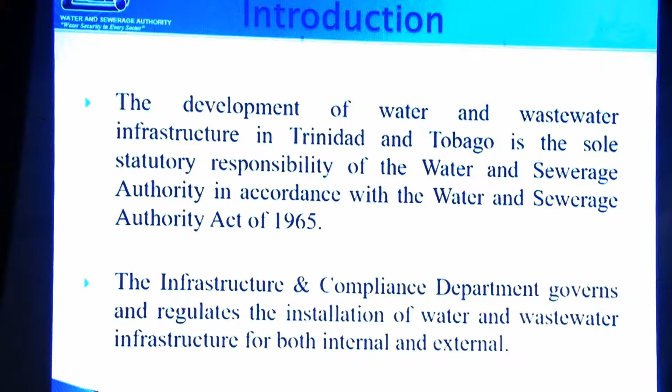The development of water and wastewater in Trinidad is the sole statutory responsibility of WASA. So whenever you plan to do that, you need to come to us for approval. The Infrastructure and Compliance Department of the authority is the department charged with receiving those applications, reviewing the applications, and granting the approvals that are required.

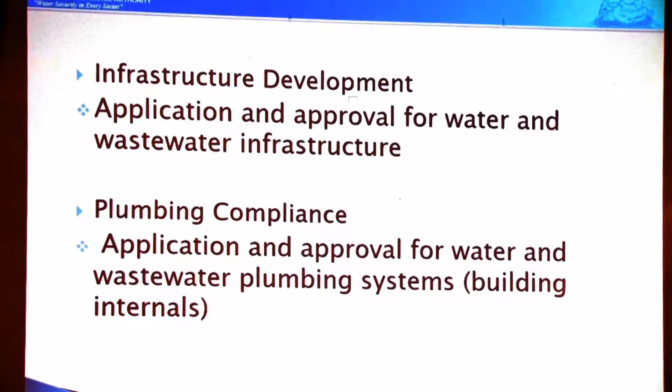The infrastructure development deals with the application for water and wastewater infrastructure, and we'll get into it a little more as we go along. The plumbing compliance deals with the application and approval for water and wastewater plumbing systems, commonly referred to as the internals of the building. I think that is the area where the licensed sanitary constructors are mostly engaged.

So the application processes for infrastructure development: there's the application, which you submit to us, and there are certain things we will do with it. Coming out of that, we'll grant an outline approval. You would submit designs and so on to us, and we'll grant a final design approval, which is a misnomer to an extent - we have removed the word final. Then we get into the inspections, pressure testing, meter inspections. We do the interconnection for the water, and of course that culminates in the granting of a completion certificate.

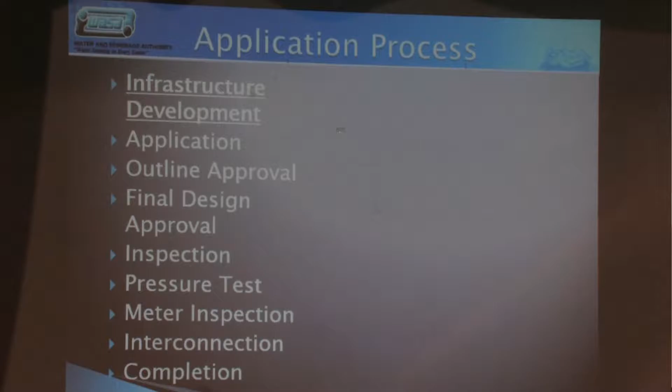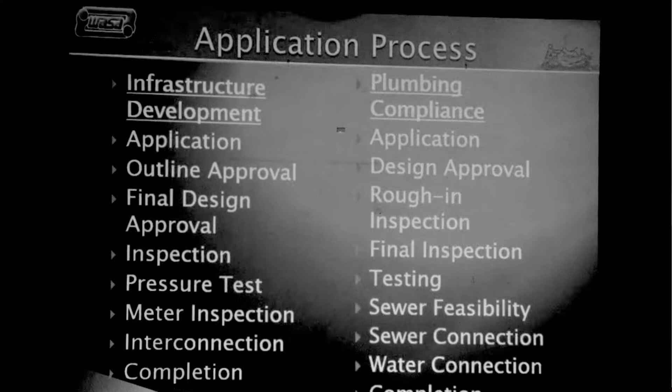For the plumbing compliance component of the department, again there's the application form, the design approval. We get into the inspection and testing stage where we do the rough-in inspection, a final inspection, some testing, a sewer feasibility and a sewer connection where required, water connection if required, and of course again it results in the completion certificate, which in both instances is the prize that everybody seeks - that completion certificate.

So the infrastructure development application process: an application form is submitted. There's a prescribed application form available at the department and on the WASA website, and these must contain the following attachment: the Town and Country Planning outline approval. Without that, we can't proceed - that's the first thing we need to look at.

You would submit it together with a location map, a topography map. In some instances, a certificate of environmental clearance would be required, but this would be subject to the Designated Activities Order - that's with the EMA - and if your project requires that, you'll get it and then submit it to us. There's an application fee of $2,500 for that application.

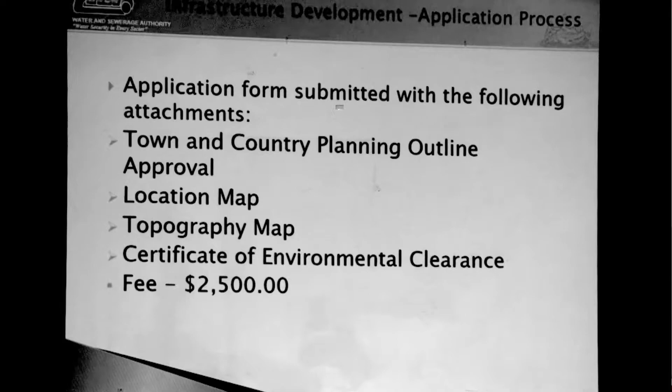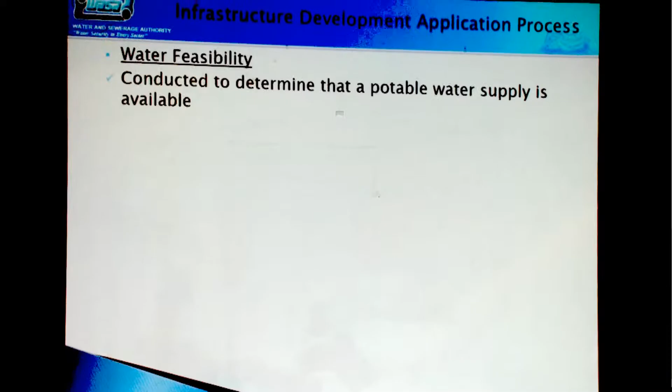Once we receive the application, we begin the processing. We conduct a water feasibility study - this is conducted to determine that the authority can provide a potable water supply to your proposed development. There are certain minimum requirements that we have under the RIC regulations to provide you with, so we conduct this to make sure that we can maintain that.

If the project is not feasible, that we cannot provide that water supply, we advise you of that, and we advise you to reapply within 6 months to a year. If it is feasible, we identify the conditions for interconnection - how we're going to connect your development to our infrastructure - that you would be required to lay certain mains and so on to achieve that connection.

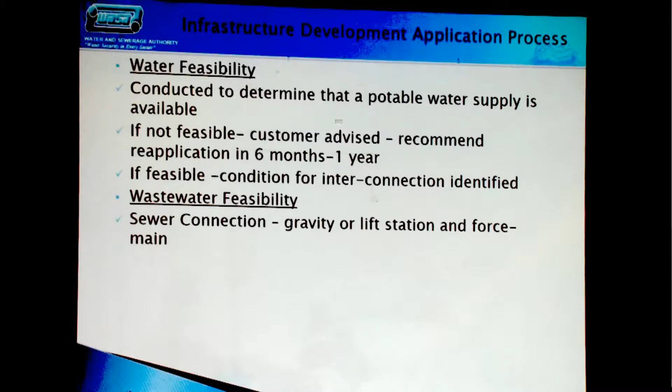We also do our wastewater feasibility assessment, and these are the preferred options we have. Where a sewer connection is possible, that is preferred. If there's an existing sewer system, we'll ask you to connect to that. If not, you may be required to establish a wastewater treatment plant, subject to CEC regulations, so you would probably need a CEC in those instances. Or we will ask you to establish an on-lot wastewater system: septic tank followed by a secondary absorption system, soakaway, absorption trench, filter trench, or ATUs as required.

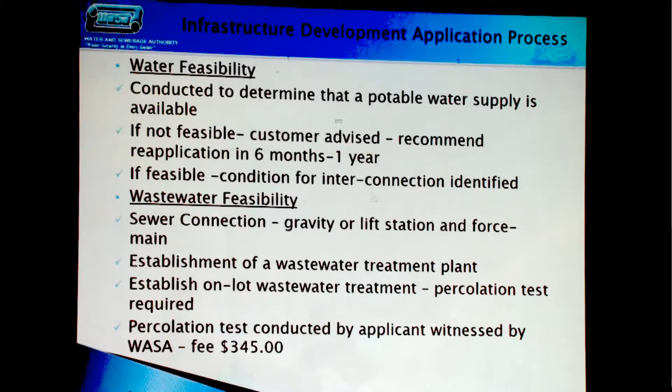Where on-lot systems are required, we may ask you to do a percolation test. There's a fee of $345, VAT inclusive, that you pay for the percolation test, and that determines the soil absorption rate at your specific development.

As we get into some of the initiatives, this is one area we have adjusted: we go with the maximum in each instance. For soakaway, 25 millimeters in 30 minutes, which is the percolation rate. For absorption trench, we go to 45 minutes, or we tell you sand filter trench. This shortens the process time, so we give you that and tell you to design accordingly. If you choose to vary from that and want to do a percolation test, we will facilitate it, but normally we don't conduct percolation tests anymore.

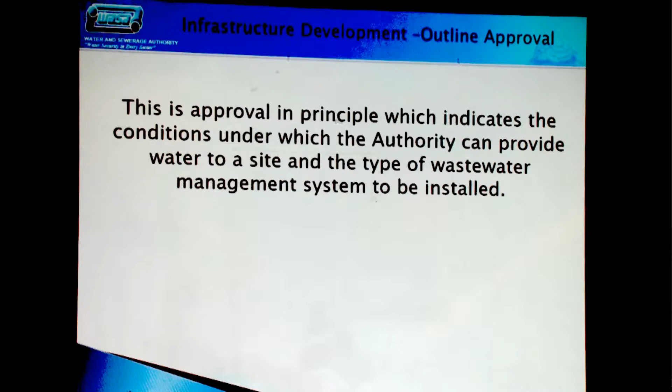Coming out of those feasibilities, we will give you an outline approval. The outline approval is basically a guide for you to prepare your designs. It tells you that your development can be connected to our water supply at a particular point, and that you're required to install, say, a 100 millimeter PVC pipe from your development to the point of connection, and whether there are any other things you need to do, like install a pumping station. It also tells you the wastewater condition coming out of the two feasibilities, so this would be your guide for designs.

So the outline approval will contain the conditions for the water connection, wastewater disposal, and the guide for your designs for approval. Then you would submit your designs based on this outline approval.

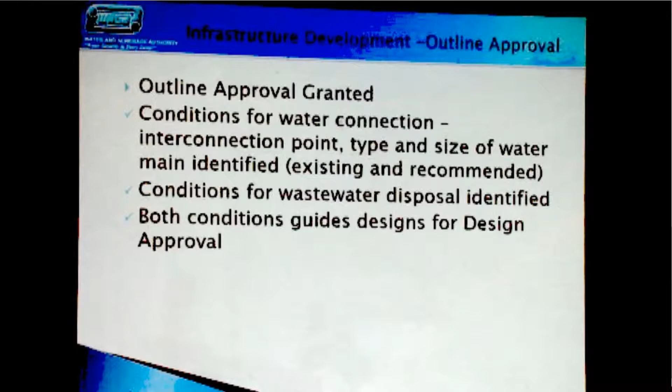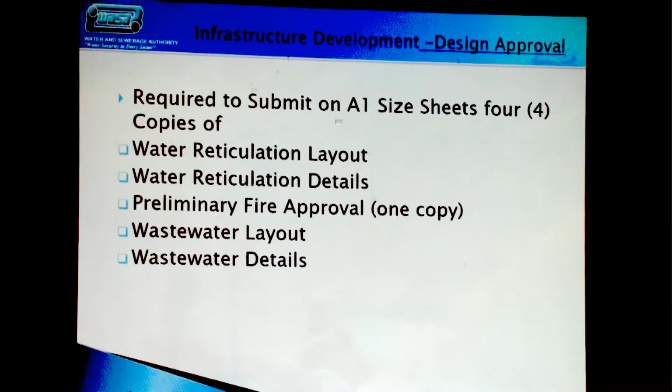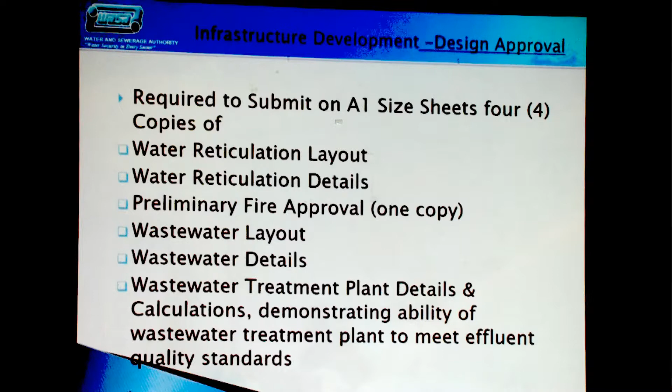Now, the design requirements: 4 copies of each of your designs submitted on A1 size sheets, and we're very specific about that—A1 is equivalent to 24 by 36. You submit 4 copies of the water reticulation layout, 4 copies of water reticulation details, 1 copy of the preliminary fire approval, 1 copy of the wastewater layout where applicable, 4 copies of the wastewater layout, and 4 copies of the wastewater details, wastewater treatment plant details and calculations, demonstrating that the proposed wastewater treatment plant, where required, has the ability to meet the effluent quality standards required—in this instance, the Water Pollution Rules 2001.

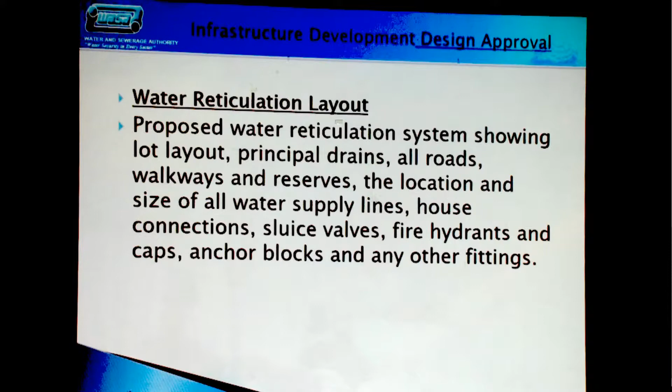Let us look at what is required on the water reticulation layout. It shows the lot layout—the Town and Country approval, or outline approval, would have stated that your development consists of, say, 20 residential lots. You cannot submit a layout showing 30 lots or 18 lots; it has to correspond with that information, which would have been contained in the outline approval. You show the layouts, the principal drains, the roadway, the walkway, the reserves, the location and size of all proposed water lines, existing lines, valves, hydrants, caps, anchor blocks—whatever is required to have the water reticulation system approved as per WASA standards.

Then the details: on the layout you will show a valve as a symbol, but in the detail sheet you will show the cross-sectional details of those valves, how you plan to install it. This is for your guidelines, so when we come to do the inspection, all of us are on the same page, as Daryl would have indicated those standards. So there's a meeting of the minds—what you're installing and what we expect you to install is documented beforehand, so we all know what has to be done.

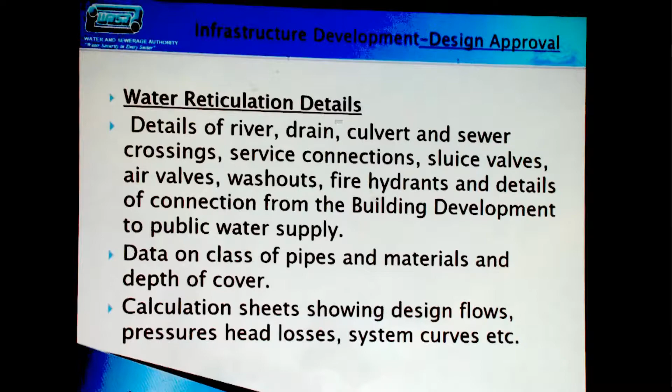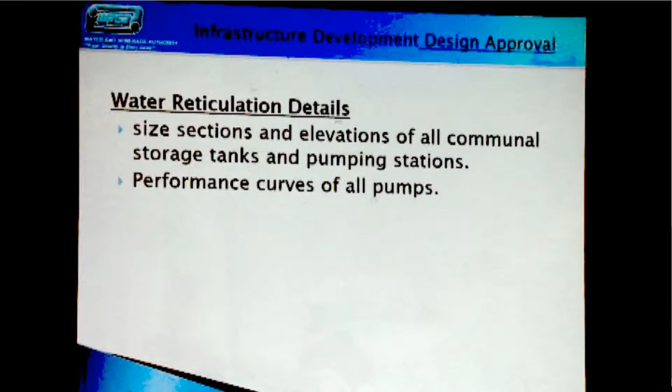So you'd submit information like the calculation sheets and standard typical details that we have available—there are very few changes to those details, just minor ones. You'll show the size, the sides, the sections, the elevations, and the performance curves of pumps, if proposed. The wastewater layout is similar to the water reticulation layout.

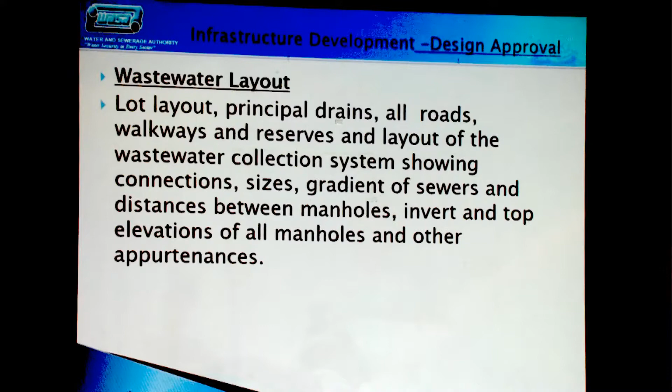Again, you don't want to have your drawings with too many details on them, to avoid confusion. So you do your water reticulation layout on one sheet, and your wastewater disposal layout on another. Where you're doing a larger development installing sewer mains and manholes, it doesn't become confusing if you submit that on a separate sheet.

These will again show you the layouts, the gradients of the sewer, and so on. Then the wastewater details, similar to the water details, you'd show the manholes, the proposed manhole details, the different elevations and sections and so on.

Calculation in wastewater is always more important than calculation in water. Water supply is under pressure, but wastewater is by gravity, so you really need to show that you can maintain self-cleansing velocities in your sewers. Based on that, that's where we grant the approval.

It's also very important for wastewater treatment, where you look at the hydraulic and organic loadings of your treatment plant, and the ability of that proposed treatment plant to meet the Water Pollution Rules 2001 standards. We don't specify the type of treatment plant - whatever you propose, we will review and approve once it meets those standards. Wastewater septic tanks and layouts.

This is important where you use an on-lot system. You show the setbacks, the minimum setbacks of septic tanks and secondary systems in relation to property boundaries and buildings and so on. That is required.

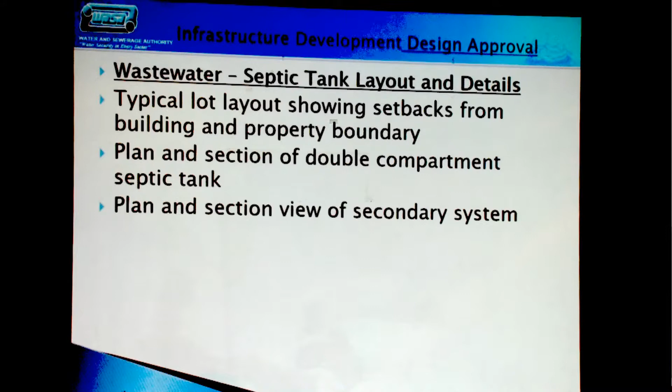Plan and section of the septic tank, and the septic tank details, the disinfection.

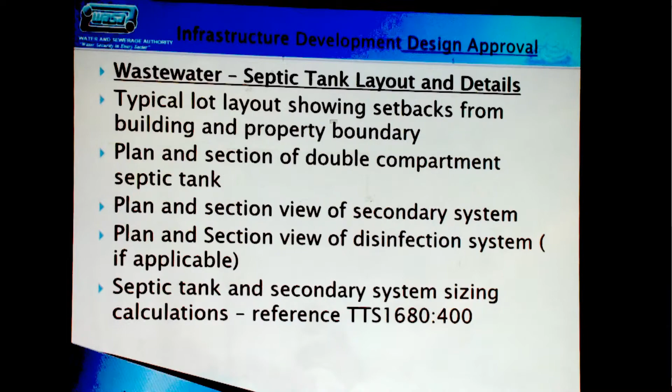I think this is one of the other areas - whereas the TTS 1680:400, the design guidelines for septic tank and secondary systems in Trinidad and Tobago, available here at the Bureau, is a voluntary standard. In our case, this is our minimum requirement, so it effectively becomes mandatory, as Darrell would have mentioned in his presentation.

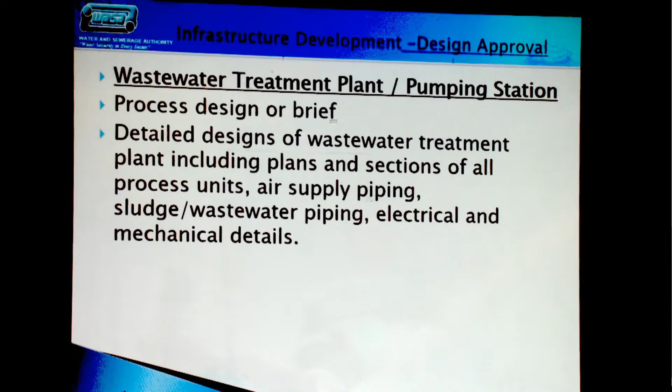Wastewater treatment plant and pumping station - these are some of the requirements: a process design brief, what it is you propose to do, and a line diagram, a pictorial diagram indicating how it flows through the process - pump station, primary treatment, secondary treatment, tertiary, disinfection, discharge.

So we have an indication of how it flows, so when we look through the piping we could figure it out. Detailed designs are required at that point because wastewater calculations become a little more complex than the others. We have to satisfy ourselves that this proposed treatment plant is capable of taking the waste you produce and discharging an effluent back into the environment that is consistent or compliant with the Water Pollution Rules 2001.

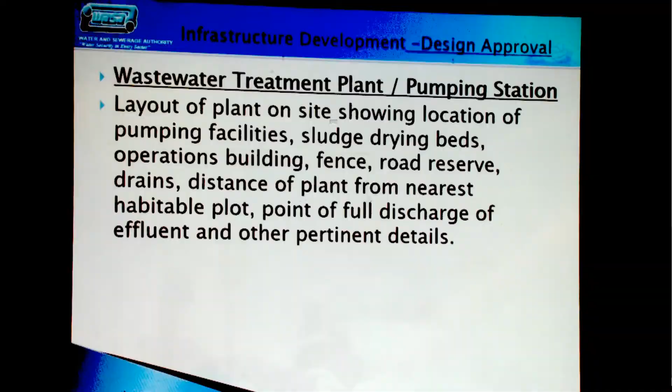So again, with the treatment plant, we would want to see the layouts, the location, because you'd have to have minimum setbacks from other properties, from habitable buildings. You would generally want to site it on the lowest elevations of the property. We require - it is accepted - that for wastewater treatment plants and systems, the preferred method of flow is through gravity, so you minimize pumping as much as you could.

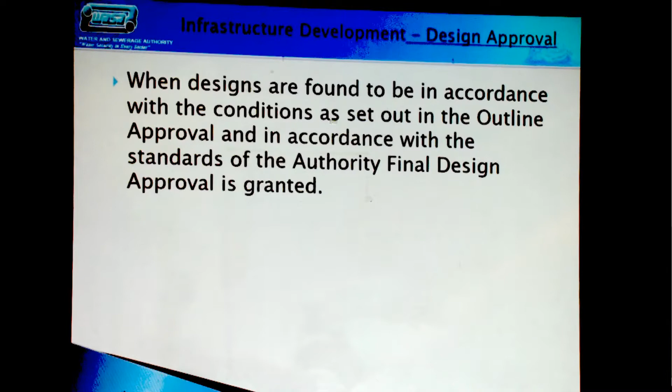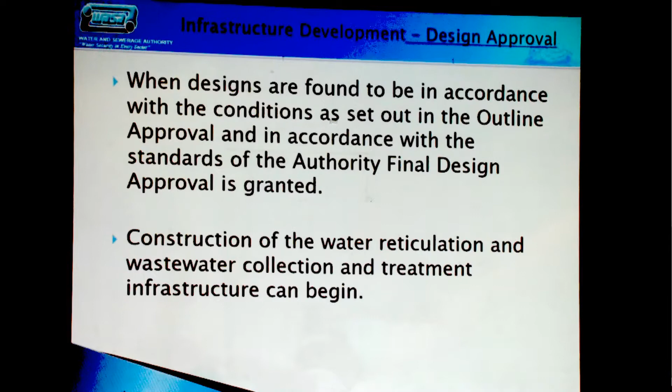We also look at the detailed designs of the lift stations, the operators' facilities, the apparatus for disinfection, etc. So you submit all these designs to us, and we would review them. When we find that based on the designs submitted, they conform to the outline approval and the water pollution rules, then we go ahead and give you design approval. Only then does construction begin.

There are a lot of instances that do happen otherwise, but if you refer back to the legal requirements, Section 66.6 of the WASA Act requires that approvals be obtained prior to construction.

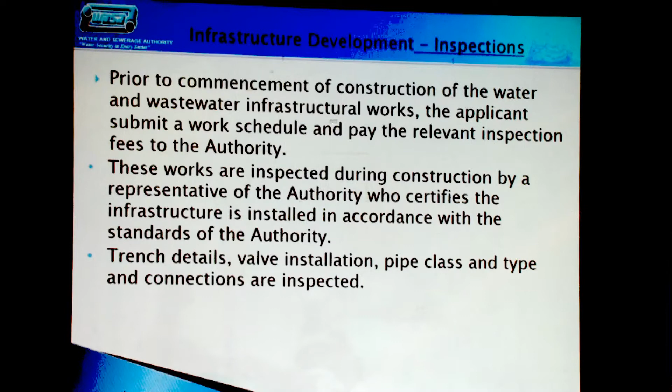We normally tell you in the outline approval that works are not to begin until design approval is received. The works are inspected during construction, looking at trench details and so on. These are some of the things we look for in the inspection.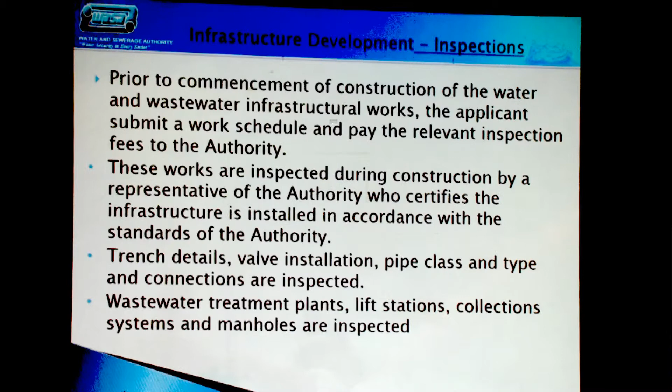When we begin the inspection stage, the wastewater treatment plant collection systems get detailed inspections. Those who have interacted with our inspectors and technicians know they are very detailed and meticulous. Once inspections are completed and we find the installation matches the approved designs and the standards and requirements of the authority, we get into the testing stage.

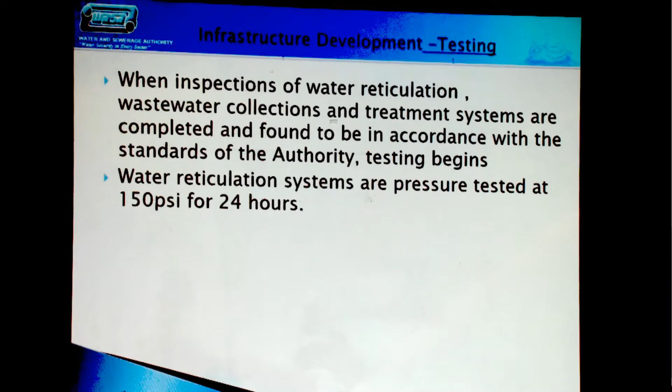We pressure test the water reticulation system at 150 psi for a 24-hour period to determine whether there are leaks in the system. There's an AWWA standard that stipulates 2 hours satisfactory, and then we do our water loss calculation based on that. We utilize that more for smaller systems where we could get it done faster. Sewers are tested, mirror and ball tested, and so on.

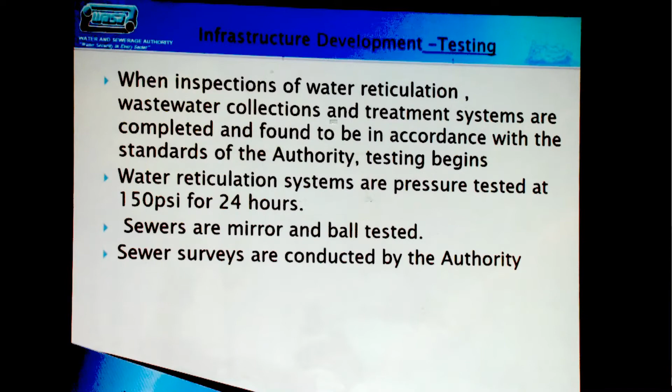We may do a flow test to determine the gradient and suitability. The wastewater treatment plants and lift stations are run with a hydraulic loading - we run the blowers and test it. But anybody in the wastewater industry will tell you a treatment plant doesn't begin operation immediately when you start it up; there's a seeding period and a commissioning time.

So you may be required to provide, not to us, but to the EMA after the fact, in accordance with your CEC, proof that the treatment plant meets the required standards. So after the testing is complete, also for the water reticulation system...

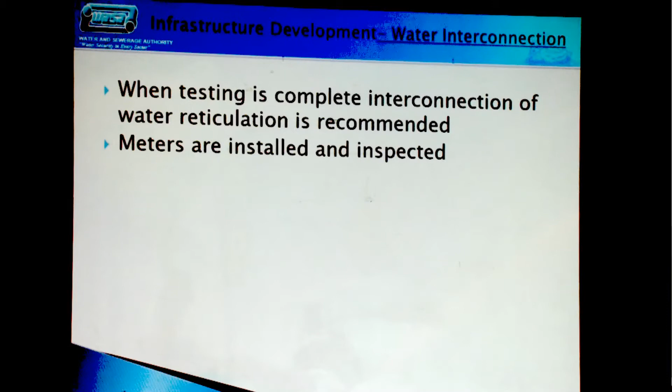The meters - all developments in Trinidad and Tobago must be metered, whether townhouses, individual lots, and so on, you must install a water meter. That's indicated on the application form, so from day one that is required. So all the meters are installed and inspected.

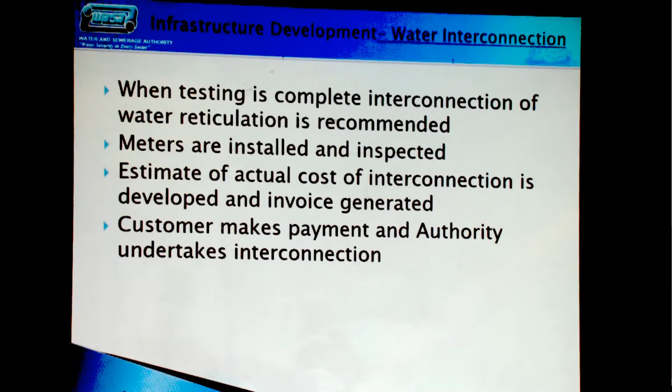The cost of the interconnection is estimated and an invoice is generated at that point. The customer would then make payment for the water connection to the authority. We will do a bacterial test and commission the water reticulation system.

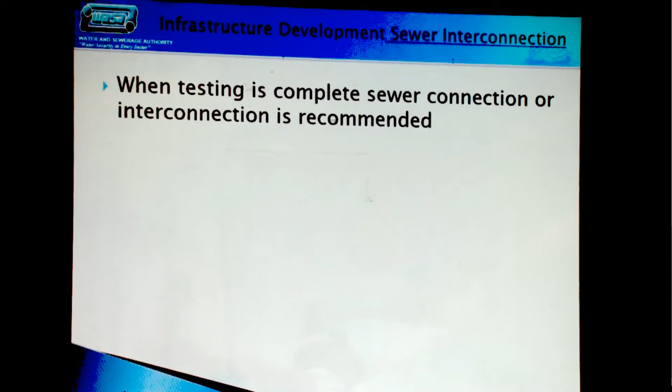Where sewer connections are required, we do the same thing, testing of the sewer system. The applicant will conduct the sewer connection under our supervision. For building development purposes, a licensed sanitary constructor is required where a sewer system is connected to a live system, in accordance with Section 4 of the Water and Sewerage Authorities Act, which regulates the requirements of a licensed sanitary constructor.

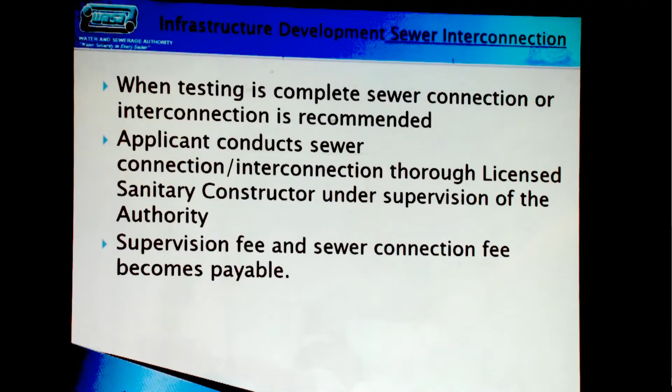Of course, supervision fee and sewer connection fee become payable at that point, and the sewer connection is conducted. So then you get to the point where, when all the testing is done, this is what you applied for - this is what you're going to get.

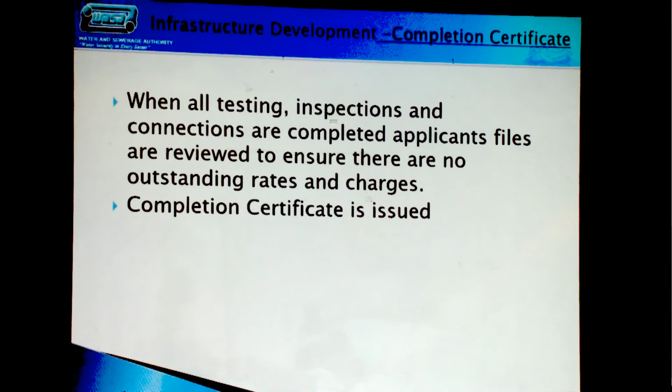We review the file to make sure outstanding rates and charges are not missed, because we tend to facilitate developers in many instances - we may go out and do an inspection or have a pressure test done, and fees may not have been collected in order to facilitate. So at that point, we come back and review the file, and any outstanding fees are dealt with, and thereafter a completion certificate is issued. That basically is the building development process in a nutshell.